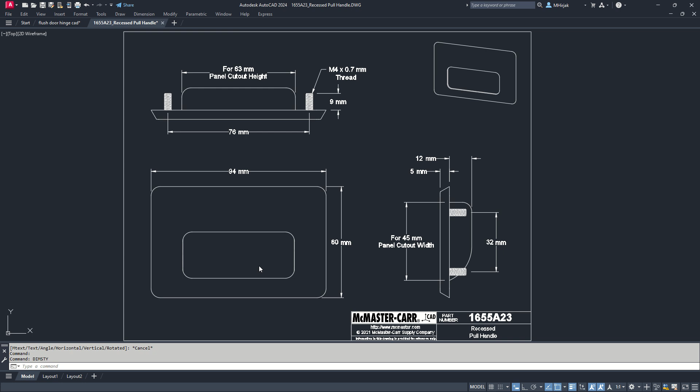So I want to dimension everything in inches, so I'm going to change the dimension style to architectural. I've already preloaded these just for this sake. You can open one of my templates and pull a dimension on something, copy it, paste it into a different drawing to use one of my dimensions if you like that. That's what I've done here, so I'm going to set architectural as the current dimension.

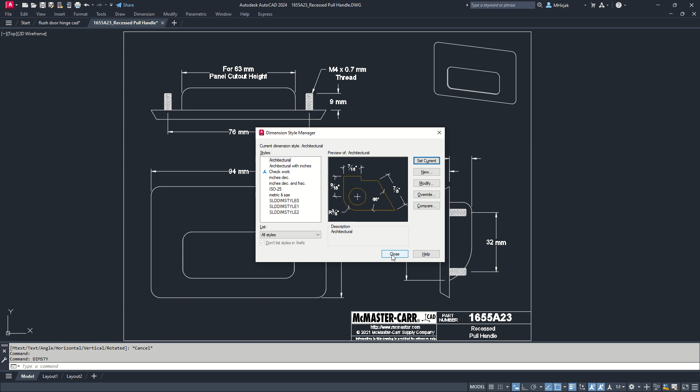So I'm going to pull my architectural dimension and see what this actually is. My current dimension scale is set to 1, so you can see how much larger they've drawn it than actually 94 millimeters.

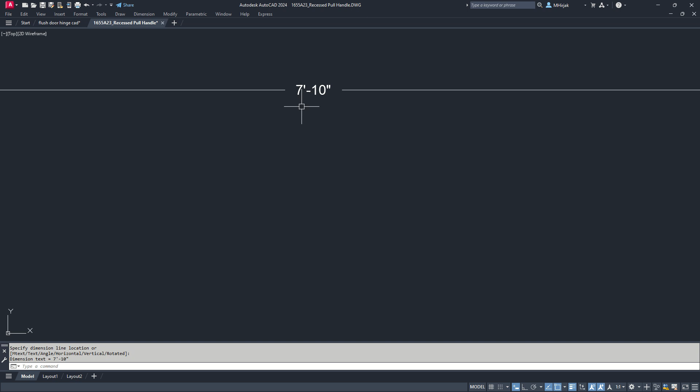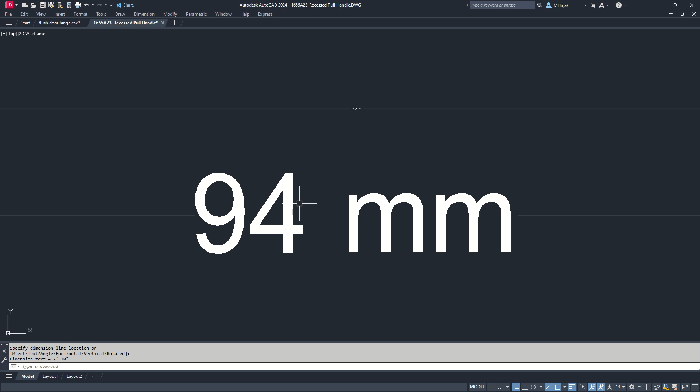When you go to the US version, SAE, they're metric because they just draw - if they want to draw something 25 millimeters, they draw a line and say 25. If we're doing that in US AutoCAD and you draw 25, it'd be 25 inches. AutoCAD doesn't decipher inches or millimeters - you have to tell it what it is. So it's just going to draw everything to that scale, 25, whatever that is. So they drew it to 94. Well, 94, when you go into US format, is 7 foot 10, because it's 94 inches, not 94 millimeters.

So we've got to do a scale here. I don't want to interrupt anything already done with this drawing that I've downloaded from McMaster-Carr, so I'm going to copy it over here. Plus we want a reference to see what's happening.

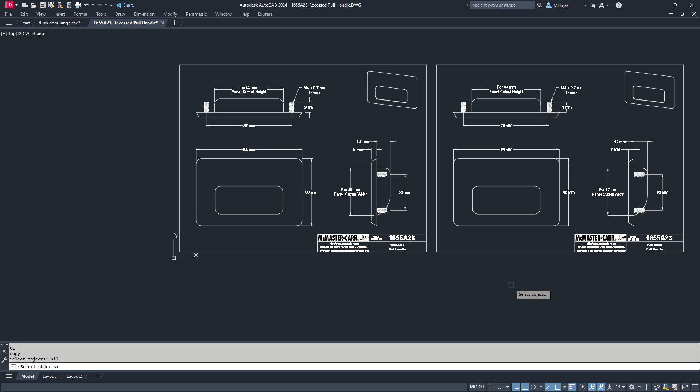So I've copied it. Now I'm going to go into the scale command. So scale, and I'm going to scale this, and we want to do a reference. But it's asking us to specify a base point, which I have to do first, sorry. So I specify the base point, and now I want to click reference.

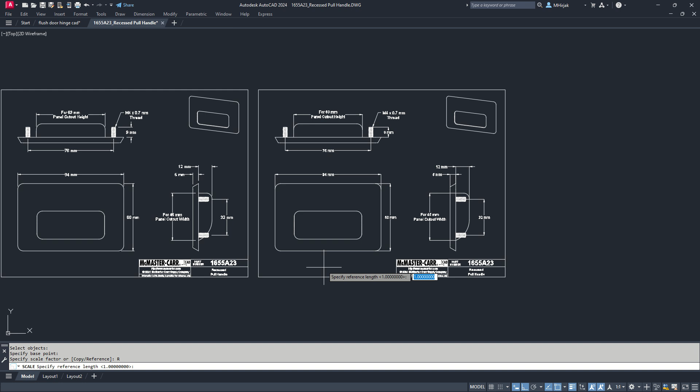Okay, so what is our reference? Our reference is that this drawing was done 25.4 times too large, so 25.4 is what I'm typing in, and then enter. Okay, so it's asking us what is the new length - it's going to be 1 of that 25.4.

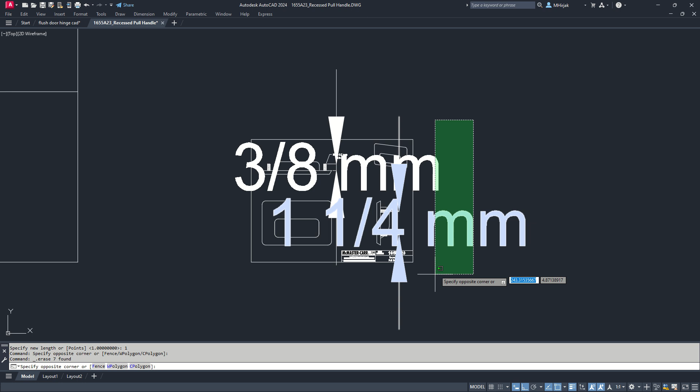Okay, so now we've scaled it to SAE, from metric to SAE. So let's see, I've already set my dimension style, so let's see what this actually measures out to. You can see there's quite a bit of difference here.

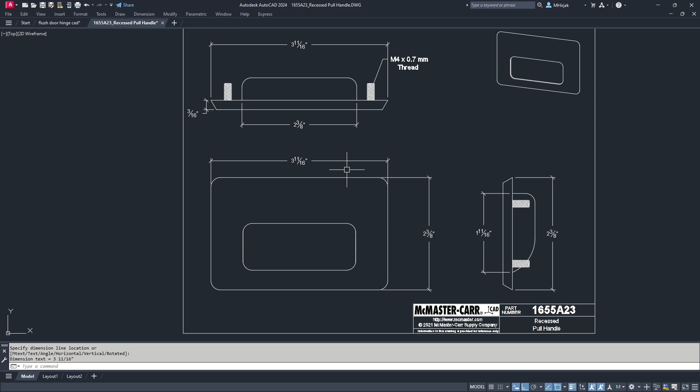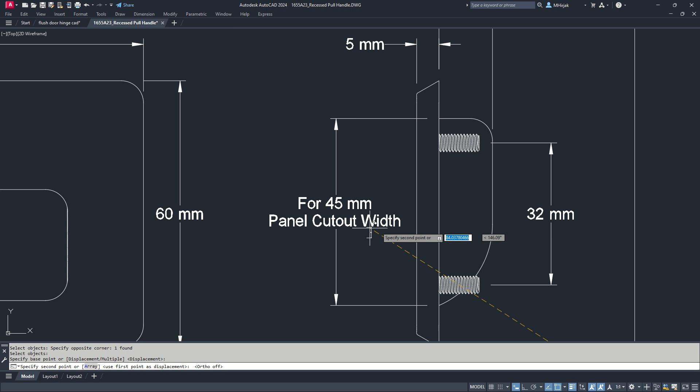Okay, so you want to verify one of these numbers? Let's verify this one. 2 3/8 is easier to convert into decimal, right? So let's take this one, 2 3/8, and they're saying 60 millimeters. Okay, so let's open up the calculator, and say 60 divided by 25.4 - there's our 2 3/8, or close - .375. So we're 13 thousandths off.

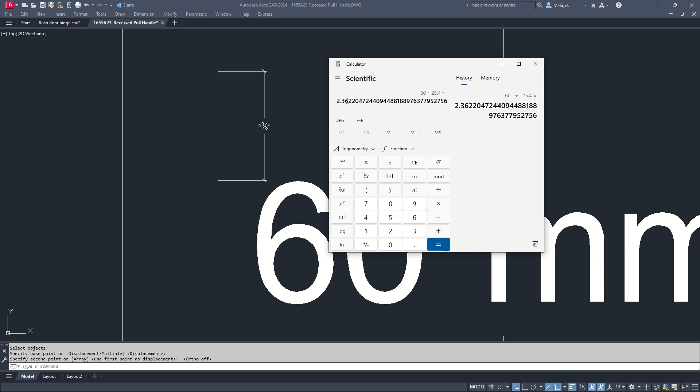But it's rounding it off, so that verifies that the scale was correct. So now you know how to use scale reference.

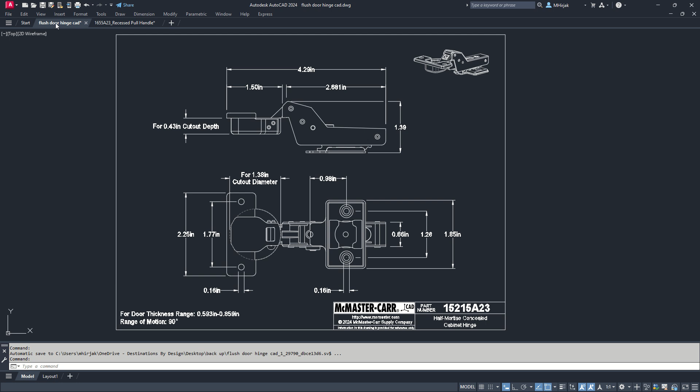Let's look at another metric drawing that they've converted down to inches for us. Let's set to architectural and put my dimension in here, which I've already preloaded. Let's see what this is actually drawn at. So their scale is correct, so we have to do nothing on this one.

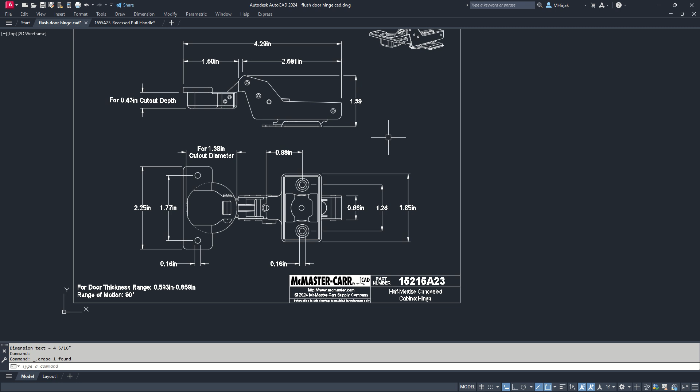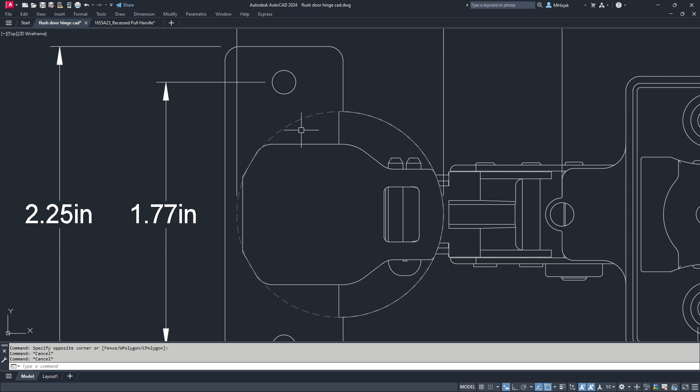Because sometimes they'll call out inches and it's still drawn in metric, so you'll still have to scale it. But that's it. Oh, let's take a look - when you see this obscure line, what that shows you is it gives you X-ray vision, and you can actually see through the part. So you're looking at this outer wall right here - that's what that's showing you.

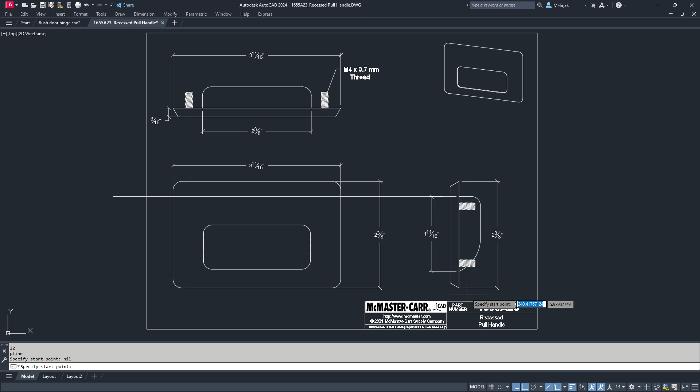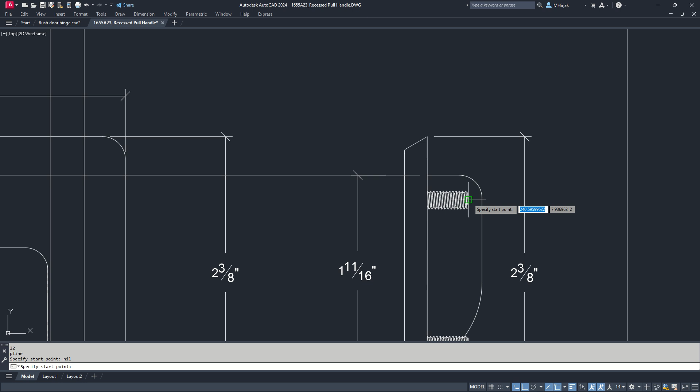So this is slightly done better than this pull handle drawing, but both of them give you enough information to do a cutout. So if I want to generate a cutout for this, I'll need to do that intersection. I need this intersection, I need that hole cut out, and I need the bolt locations, the screw locations. So I'll need the intersection of these screws. So with those two intersections, I've got this cutout, and I've got my screw hole locations.

That's it for today. Thank you.